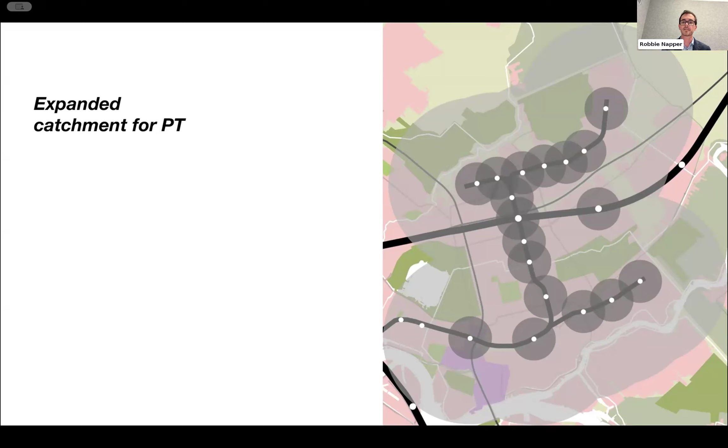The second beautiful thing that happens when you combine micromobility and public transport is speed. It's remarkable what you can achieve. So if we think about a metro map, or a large city that's got railways everywhere and trams everywhere and buses everywhere, you can use your micromobility in accessing that mode, and then reap the benefits of that high speed part of the mode. So you can jump on an express train, have a little break if you're using a human powered or partly human powered vehicle, and get off at the other end, having traveled fast. So just the speed is really lovely.

And I think there's also an equity thing in here as well. There's a very large segment of the population who do not have access to cars, or are too young to drive them. So if you're a kid with a scooter and you're 12 years old and you're going to basketball practice, you could combine modes, and have that speed that your parents might enjoy in their car, but you don't have to own a car to achieve that speed. Whether you beat it or not, it's definitely faster than cruising along at 15 kilometers an hour on your bicycle or scooter. So there's some really nice things that happen there, I think.

There's a sort of a group of reasons together here: flexibility, space saving, and lower cost. The alternative mode to a lot of these journeys is the car. And the thing about a car is you tend to want to return to it in the same way that you might want to return to your own scooter or your own bicycle.

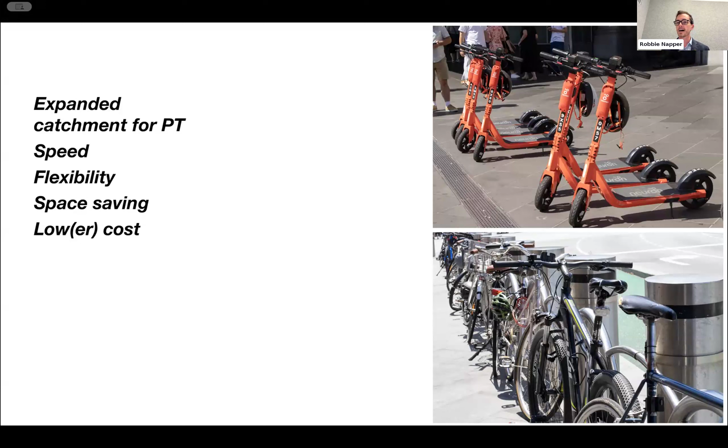And they cost less as well. So the ownership and maintenance of these vehicles is more accessible than a lot of the alternative vehicles that are on the market today. Cars are very expensive to own and operate. Scooters, e-bikes, these sorts of things are lower cost. So it is possible for households to get rid of one of their cars, or even to go car free or car light in their lifestyle. So there's all these wonderful benefits.

That's all well and good, you might say, but aren't there a lot of moving parts? And indeed there are. And so the next part of my brief presentation is to just describe what some of those parts are. And if you've heard me talk before, you'll know that I love the starting point of looking at vehicles. And of course, we're combining stuff, folks. So trams, buses, trains, we've got to think about how these vehicles work and about how they work in our local area. Not every metro train is the same. All sorts of cities all over the world have different bus configurations. Trams, old and new, very different configurations, different things going on.

But what we're doing here is we're combining these with other vehicles. We're combining them with things like basic city bikes, like electric scooters. And that's where things get kind of spicy and kind of interesting. We actually need to really think through these characteristics of these vehicles. Some of the electric scooters are quite big these days. Some of them are really small and they fold up and they're smaller than a suitcase, which is amazing. There's also a whole bunch of new micromobility vehicles on the market that can do pretty amazing things,

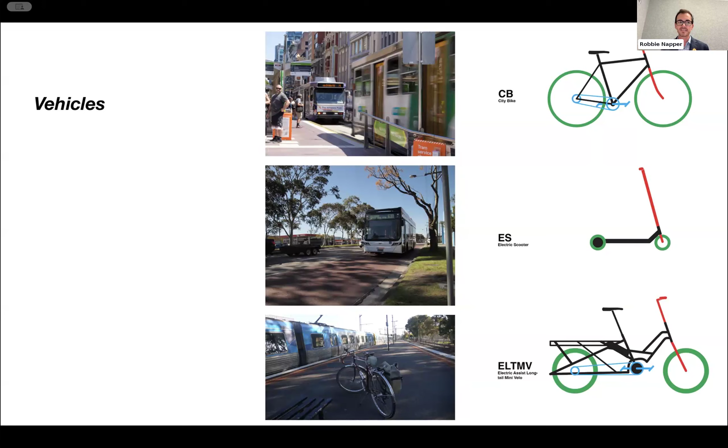but they're a bit different. So we have bikes like this electric long tail mini velo, which is just a bicycle typology. It can do amazing things. It's electric assist. You can carry 2 children and 50 kilos of groceries if you want to. But if I show up with a bike like that and I want to put it on the front rack of a bus, I'm going to really struggle because that micromobility device actually weighs 60 kilograms. You can't lift it up. So we have to think about how we join these vehicles together.

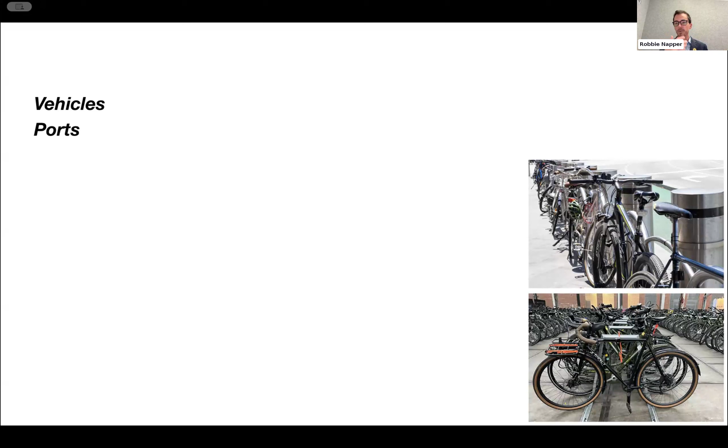Next one, of course, is ports. What happens at the places of interchange where we get off one vehicle and get on another? Do we just have kind of informal, leave bikes and things everywhere, or do we have more structured environments where we're expected to put things in particular locations and we can therefore fit a lot more in? That might be kind of good. Back to that contested space kind of issue as well.

Where do we leave them? It's great to have accessible vehicles, but should they really be occupying the footpath? Couldn't we maybe occupy different spaces, occupy some road space or something like that? So we've got to think about what happens at each of these ports. It can get really tricky, but there are some good solutions out there in the world as well.

If you're operating a share scheme, you're going to have a lot of vehicles piling up at your ports. There's going to be a stockpile. So here we have the Dutch OV Fiets bikes, and there's thousands of these at some stations. So they've got to be designed in a way and housed in a way that can be efficiently carried out without damaging the bikes and to make them accessible to end users.

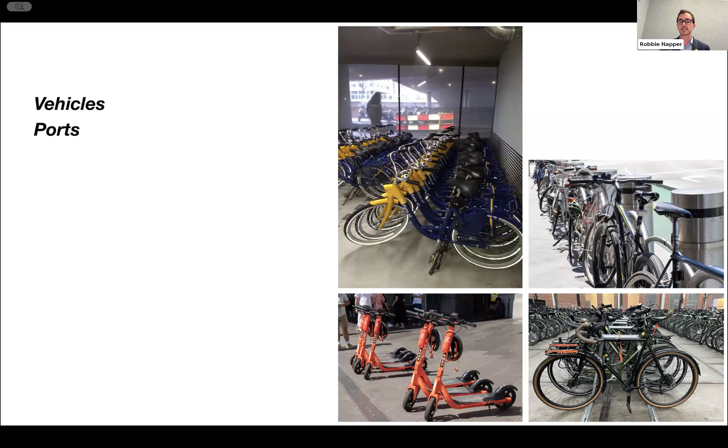And also at ports, different things happen. I was amazed to find here in Delft, at the Delft station, there's a 30-minute parking for bikes and scooters out the front. This is if you're just popping in to top up your card or buy some frites. So there's this sort of system that has to work at our places of interchange. And typically the space at those places of interchange is really precious.

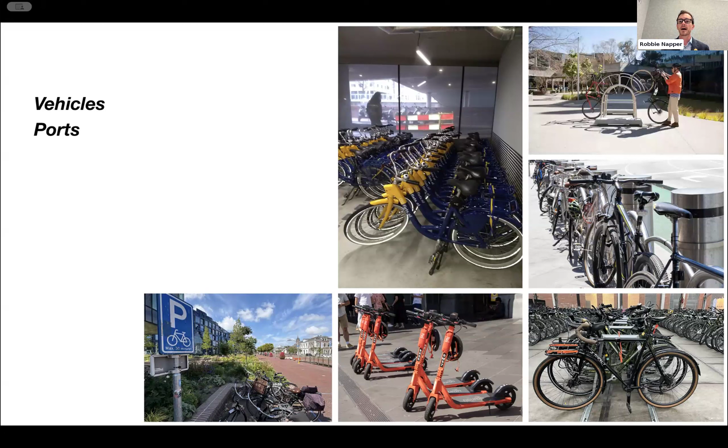Here's a bike rack that we designed in my lab to put bikes into a car park without digging any holes. We've got to think about the ways as well, the connective tissue. And of course, infrastructure is the big issue with micromobility, how we share the shared paths, how we share the roads. We've got to think about how these vehicles work on the paths that are provided.

Do we have that? Do we actually have a robust sharing system that tells me when they've run out of bikes at the other end and I can come up with something else? Or do I just not know that and I sort of have to take a leap of faith? The information we provide can also provide some behavioral controls.

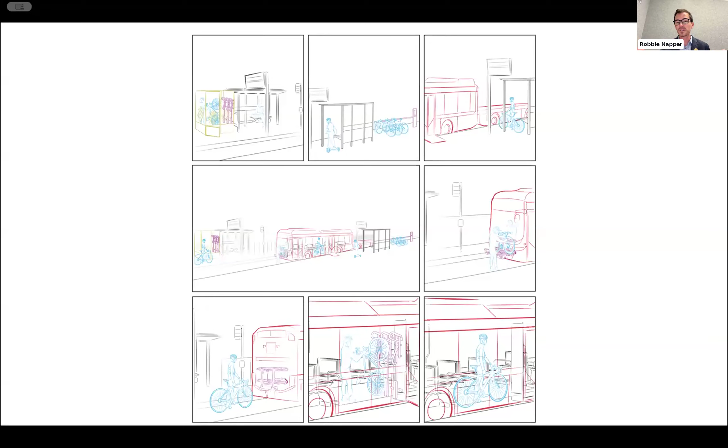And of course, in Melbourne here, we've seen some bike racks starting to come on the front of buses, which is really useful too. But as I said before, you've got to sweat that really small stuff. You know, how does a person lift their bike? How do they lift their e-bike on board if that's what you're doing? So there's almost too many options, folks, but that's really the message there. Getting them to work in harmony requires us to think about all the tools that we place at the disposal of that rider if we want to get them to make that decision, or if we want to just make their life a little bit easier, more equitable, maybe save them some money, that kind of thing.

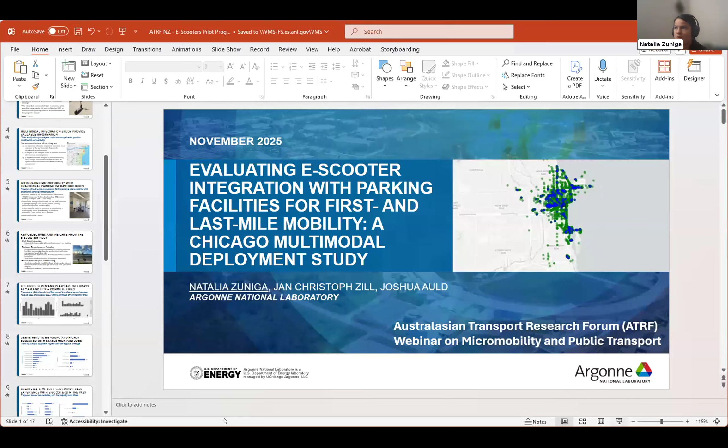The presentation's name is Evaluating Electric Scooter Integration with Parking Facilities for First and Last Mile Mobility. Specifically, it is a use case, a Chicago deployment study. My co-authors here are Jan Zill, who's actually locally located in Australia, and Josh Auld, who's our team manager at Argonne National Laboratory.

The main motivation of this specific project was the traffic that we see in the city of Chicago. Parking is a big issue in the core downtown of Chicago. Research estimates that 30% of the vehicles in traffic are likely cruising for parking. This happens a lot when curb parking is cheaper than off-street, and people prefer to cruise more trying to find parking, and this generates a lot of congestion, which can scale up to significant magnitudes.

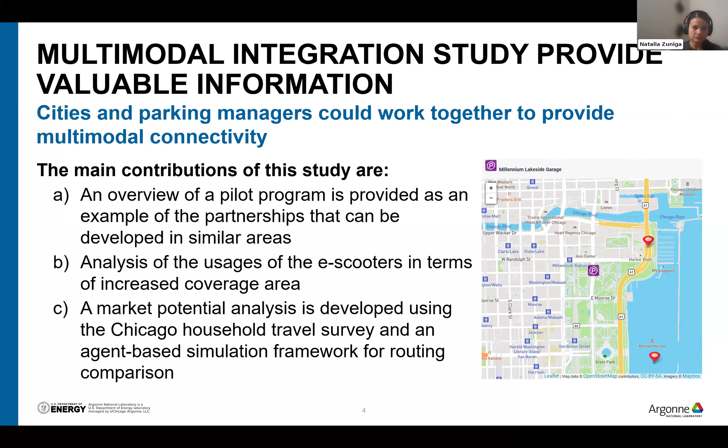Finally, we did a small market potential analysis using the Chicago Household Travel Survey and an agent-based simulation for routing comparison, in which we mainly wanted to understand what would be the maximum market potential of this specific electric scooter option. This is an example of how the electric scooters were located at the exit of the parking lot.

The program aimed to set a precedent for integrating micromobility with traditional parking infrastructure, and included partners such as Civic Infrastructure Collaborative, Argonne National Laboratory, Millennium Parking Garage, which is the main owner of the parking I mentioned, and Ridy, the electric scooter provider. We advertised the program through direct email, the Millennium Park Garage website, in-garage signage, and parking platforms such as SpotHero and ParkWhiz.

One of the main roadblocks we had was getting users to understand the program and use it initially. Users can start using the electric scooter by completing a very brief sign-up form, downloading the cell phone application and setting up an account. This also allows us to ask for more information about socioeconomic and demographic aspects of the users. One of the limitations, of course, is that it was restricted to this specific garage, but the idea is to provide an example of how this can be extended to other garages across the city.

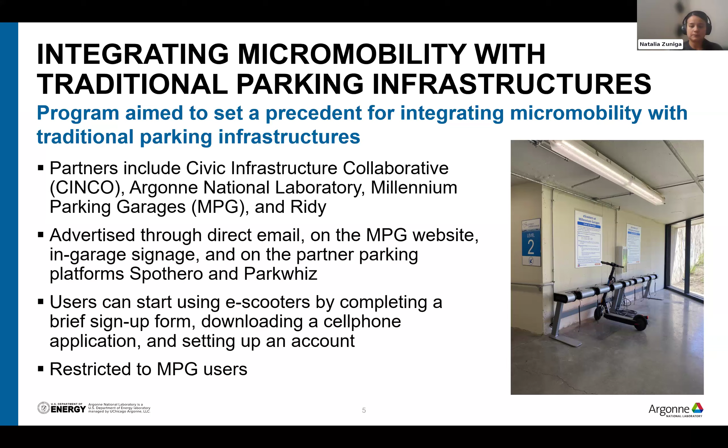The main objective of this pilot study was to foster this multimodal integration, integrate the electric scooter with the existing transport and the parking network, and enhance this travel convenience for parking customers. The electric scooters were strategically placed in docks with clear signage and wayfinding aids, and we provided this partnership with SpotHero and ParkWhiz, which are platforms for parking providers, and for advertising this.

And the main goal was to try to scale this adoption, to analyze how replicable this model is to attract private sector interest and demonstrate that success, and encourage that scalability across different urban centers, not only Chicago, but in other areas.

A few highlights of the first part of the pilot program. We found the highest demand peaks are weekdays 7 a.m. and 6 p.m., which are actually commute times. And for the first part of the program, there were more than 1,000 trips in a year. This is the first fleet, which is only 8 electric scooters at the beginning. We got almost the full electric scooters occupied almost all the time. These are the most frequent times that we saw.

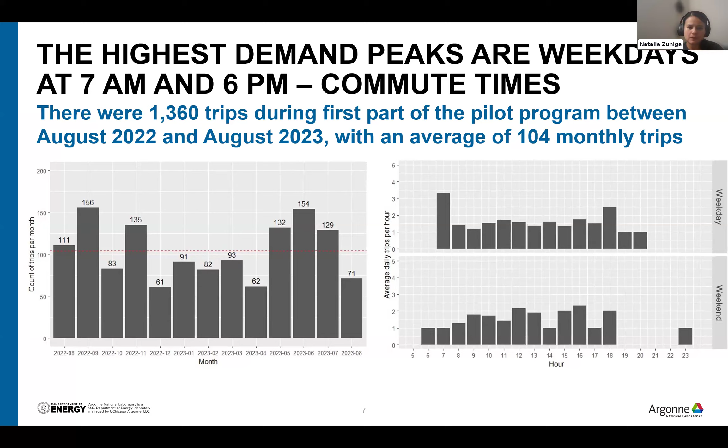And some highlights about the users that we found. They tend to be young and highly educated with stable, high-paid jobs, and their household income is higher than the regional average. And nearly half of the users didn't have experience with electric scooters in the past, which is interesting. They were able to still adapt to the program. They own 1 or 2 vehicles, and the majority own bikes.

And we went deeper into the data. Now that we have access to what the users were doing in the city, we wanted to try to understand how helpful and how useful the project was in terms of behavior and what they were doing. So we did a specific first test trying to catch what were the stops that they were making and what they were mainly doing. So we classified and detected some of the stops with the trajectories that we obtained. The star here represents the parking location, and then we spread the stops across the city to see what they were doing.

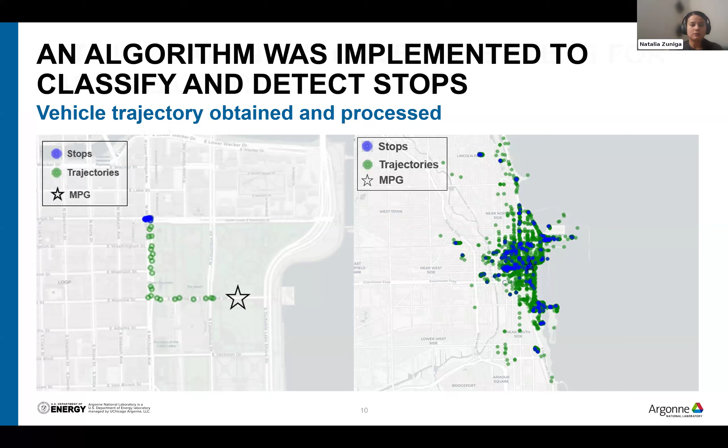And with information on the trip characteristics, we did a short analysis on understanding what they were doing. So we mainly found that the service expanded the coverage area for parking users. The average trip distance was about 1.2 kilometers with a maximum of 8 kilometers. And we found very clustered areas of work within the core of the city, specifically entertainment across the major touristic attractions, and some other trip purposes spread across the city.

But the thing that we found the most interesting is how this program can help reduce the need to search for parking near the destination, as it increases the accessibility and the catchment area that was discussed in the previous presentation, in which users are usually willing to walk only a quarter of a mile or 400 meters. But with access to electric scooters, they were able to access locations that were even further away. Were they using only their vehicles, they would have been searching for parking in those specific areas. But now we provided a specific mode in which they're more flexible to access different locations in the city.

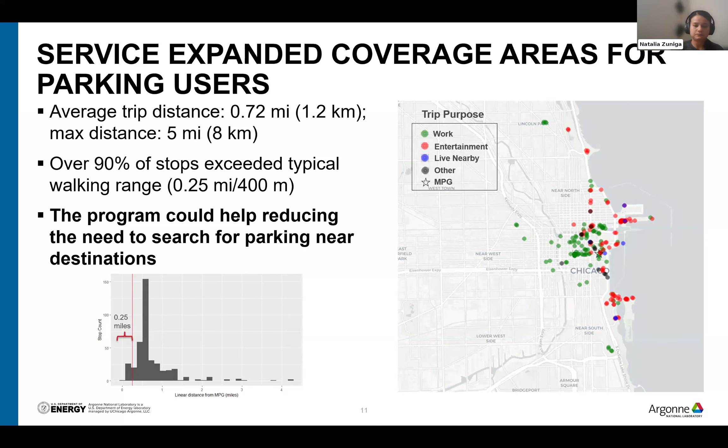With that in mind, we did a very small study trying to understand how big the potential market is for developing a larger scale model for electric scooters. So we basically analyzed the area in which the electric scooters were operating in the city, and we recreated daily tours using the household travel survey and our agent-based simulation, which, with a sample of the population, tells us what they do across the day. So what we were trying to do is recreate all tours in the city of people who in a day were doing a similar pattern of trips.

And we found that nearly 97,000 tours per day could be replicated within this model, in which they could park here and reach their area. Of course, this is the maximum potential achieved if all users switched to electric scooters. And when we go a little deeper into the user characteristics, we found that the adjusted potential demand could be in a range of 5,000 users for the whole city in a day. And this could help us have an idea of how we can scale this up, and it helps support parking managers planning for future program expansions.

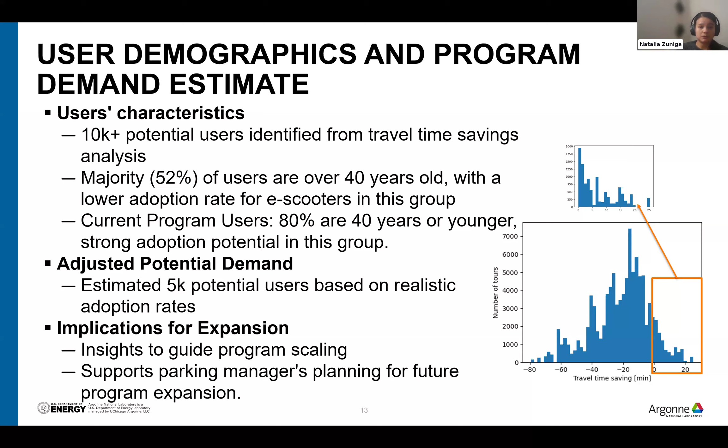With that, just want to summarize: this pilot study offers a promising solution for improving urban mobility, reducing congestion, and supporting mobility improvement goals. We examined this first mile, last mile solution to parking cruising in the downtown area, and included some aspects of user behavior, trip data, and market potential. The program impact is more on the side of promoting alternative mobility, integrated solutions, and high customer adoption. We demonstrated strong demand and success in the pilot metrics.

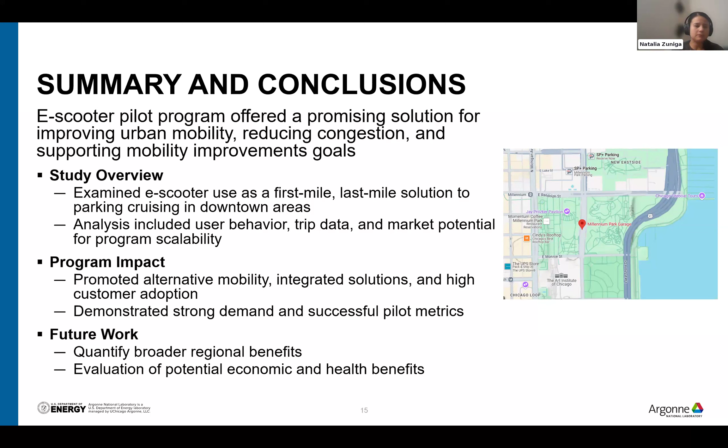And for future work, we're working on quantifying broader regional benefits. What would happen in simulation if we had this program in other cities, in other parkings, on a larger scale. But also there are multiple other economic and health benefits.

With that, I pass over to the next presenter. I think you're on mute, Tim. All right, I was just talking to myself. That's okay. Yeah. Okay, so I'll go fairly quickly through this.

This is a project that started a couple years ago. It was funded by the New Zealand Transport Agency here in New Zealand, NZTA, under a program, unfortunately no longer running, an innovation fund, which offered really anybody an opportunity to put together a research project, generally applied, testing something on the ground, that was fairly free to be successful or even unsuccessful and share the learnings from that process. It's an unusual way of funding projects.

We threw our hat in the ring here and developed what's called the Glen Eden Micromobility Hub, which is the idea that we could maybe bridge some of the first and last mile gaps to public transport in a fairly suburban neighborhood, an area that doesn't have good infrastructure for micromobility, has lower income households, has a higher proportion of Maori and other minority populations. And then to do a lot of testing to see how uptake might happen.

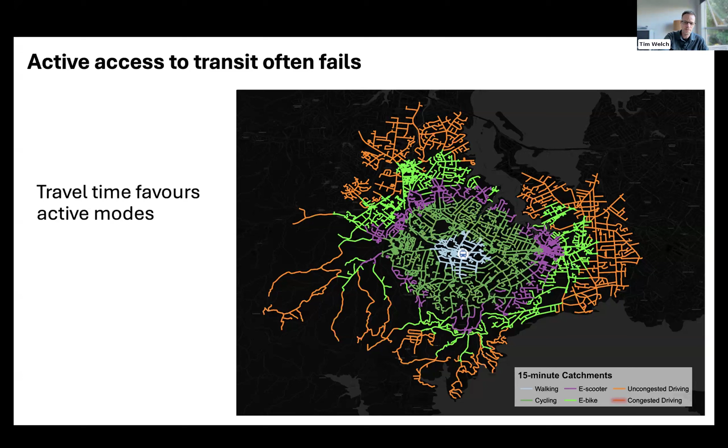Our pitch for this came from the idea, and Robbie mentioned it a little bit earlier, of a catchment. And so in Glen Eden, and for many other neighborhoods in Auckland, what we find is that if you just look at a traditional catchment that is uncongested driving, it typically gets you the highest catchment. But not far behind that are e-bikes and e-scooters and cycling and walking to some extent. These active modes actually have really good catchments and travel times.

If you consider congested driving, and this is a catchment measured under actual driving conditions at peak hour, that catchment for driving drops significantly, and suddenly active modes or micromobility modes have a much larger catchment, a much faster travel time. But yet we still see cars dominating the ends of trips across Auckland.

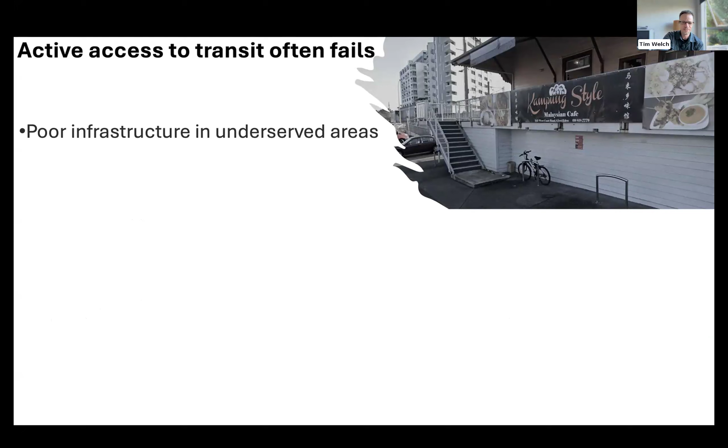Part of the reason we see this is, and these are images from Glen Eden, really poor connectivity and poor infrastructure connecting to stations across neighborhoods. So this is where our future hub would be. There's one bike staple with one bike. We like to say that this entire hub was planned for the one person here that year after year brought their bike over. So we were happy as long as they adopted the hub. And if someone else did, that's a 100% increase in cycling to this station.

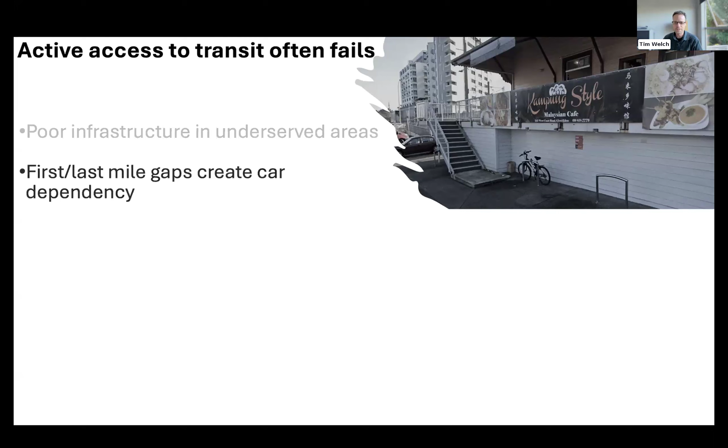So the first last mile gaps create this car dependency. We see that over and over. This is old, it's in the literature, it's nothing new in that sense. There's high cost to transportation, right? Whether you're owning micromobility or a car, it's expensive all around, and public transportation is becoming more expensive as well. Lots of safety concerns.

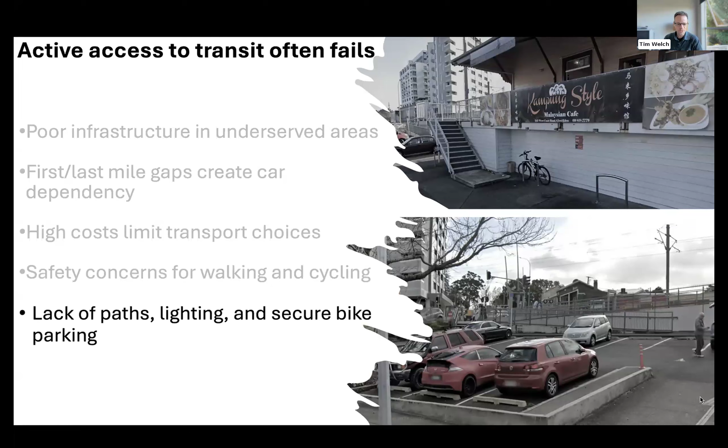The environment, especially in Glen Eden, was set up to prioritize cars, and everything else seems like a bit of an afterthought. So people just avoid it because not only is it not available, it just doesn't feel safe. There's a lack of lighting, there's no secure bike parking. We roll out the red carpet for cars. We don't do that so much for other modes. So we decided to beg, borrow, and eventually steal 3 car parks at the station. It was a long endeavor.

This was a project that was going to span essentially 14 weeks to set up and 6 months of study. It took us a year to get all the permits to actually put this infrastructure in, because the car parks were considered road infrastructure, and that's very onerous to put something down right on the road. Eventually, we got it with some high-level help, cutting some red tape along the way, and a lot of learning.

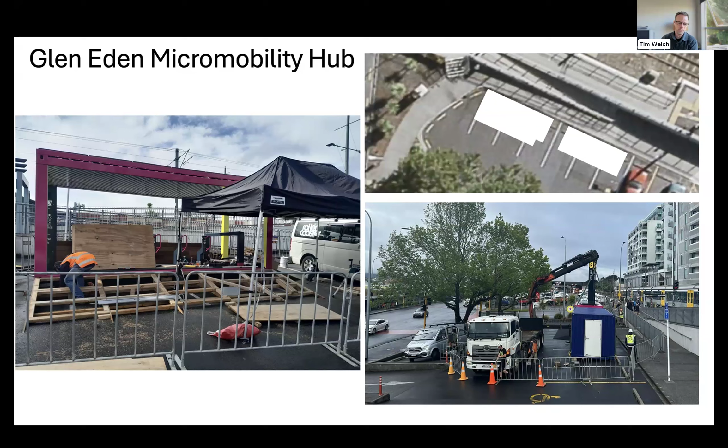But we basically eventually dropped two 20-foot containers at the station, and have developed some smaller hubs along the way in the neighborhood to help bridge that first last mile gap as well. So this is the station before the hub. And then this is after the hub, the infrastructure we built.

The big pink container has secure e-bike parking and charging, and a giant wayfinding sign there, community messaging and maps. And then the other container is a maintenance and distribution facility for rental shared scooters and e-bikes. The shared scooters and e-bikes were also tested because there were no shared scooter companies operating in this neighborhood or even close to this neighborhood at the time.

So part of it was us encouraging companies to come into the neighborhood and operate. We were operating initially under the idea that if you build it, they will come. But we got nervous that maybe if you build it in a place where it's never been built before, they might not come. So we decided to develop a community engagement and community centering program.

We engaged a local muralist who did workshops in schools. He painted a mural on the side of one of the containers. They painted similar murals in the schools; they designed their own. We painted initials of each school onto the container to provide ownership for the kids, who would then bring it back to their families and say, look at this, we've got this hub.

In conjunction with Auckland Transport here, we did learn to ride activities around the hub and in nearby parks, to introduce the idea of micromobility and the use of public transport in the neighborhood. A lot of this was subsidized by local community grants as well, in addition to the grant we got from the NZ Transport Agency.

We also conducted before and after studies in the community to see if attitudes towards public transportation, towards micromobility, and towards the combination of the two had changed. I'll get to that in a second. We also measured changes in use of public transport. These are not causal relationships, but they are correlated.

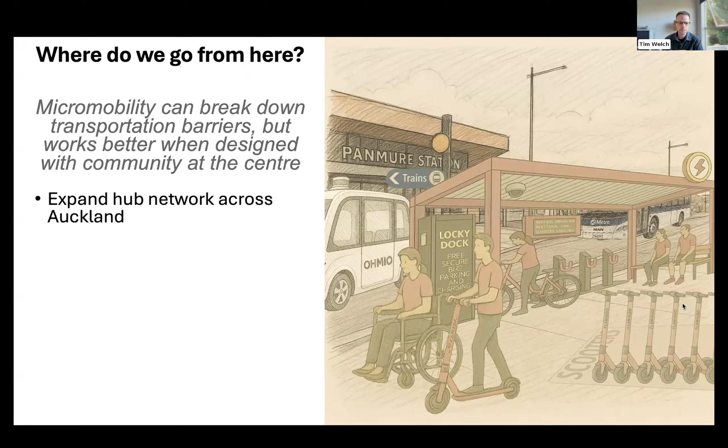We're working towards an expansion of the hubs network across Auckland to see if we can grow the footprint there and grow ridership. Again, more demographic specific programs to bring in a larger proportion of the population that may not always use these modes, and strengthen our community partnerships. There's a lot of agencies that work in a kind of a siloed environment that we can work with to create a more holistic micromobility program.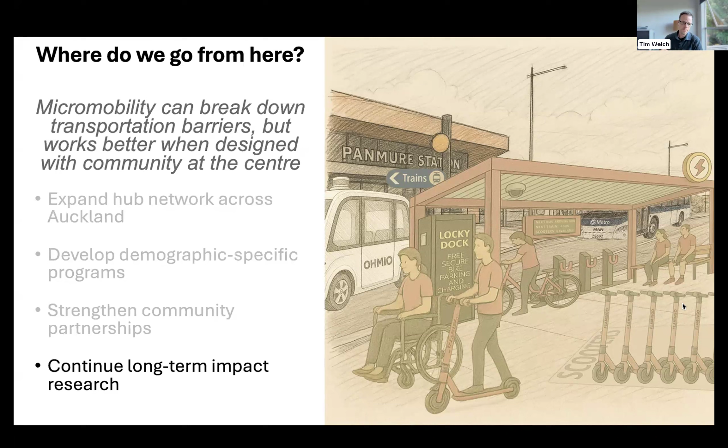And again, back to what we really want to do is have longer term research and figure out how micromobility can be better integrated in the community, better used to enhance public transport. Really, we just need time to do that. It's a really new mode, and deep studies into this are still fairly limited. That's one of the keys we need. That's the micromobility hub. And so as we go, we're trying to expand this program, encouraged by the very small budget of the initial pilot program.

Good for me. Great. Thank you very much, Tim. And thank you very much to Robbie and Natalia as well. Three great presentations, each providing different perspectives on this topic, which is quite nice to see different ways of examining it. We have had some activity in the Q&A, and thank you to the panelists for answering those questions. I don't know if any of you'd like to elaborate on some of those responses, but we might take a couple of them before addressing some other questions.

So I see one that's come up in relation to banning electric bikes on board public transport services in Sydney. Victoria are considering doing the same, of course. Do any of you have any particular views on this topic in terms of the potential safety issues or not, whether this is something we can overcome, or if it is a valid reason for banning them? Robbie, do you want to elaborate maybe on what you've said already? Yeah, sure. I actually thought this question would come up today.

I think it's not a mobility issue. I think it's a battery regulation issue. To me, it's sad when the can gets kicked down the road. There's so much great stuff that we can do when we combine modes, and I think it's easy to pick on the new mode. As humans and in society, we've been picking on the new mode ever since there's been new modes. When the bicycle first came along, it was going to scare the horses. Then when the mopeds arrived after World War II, they were going to scare the bicycle riders, and it's always been a thing. So we have to have better ways of planning for these modes.